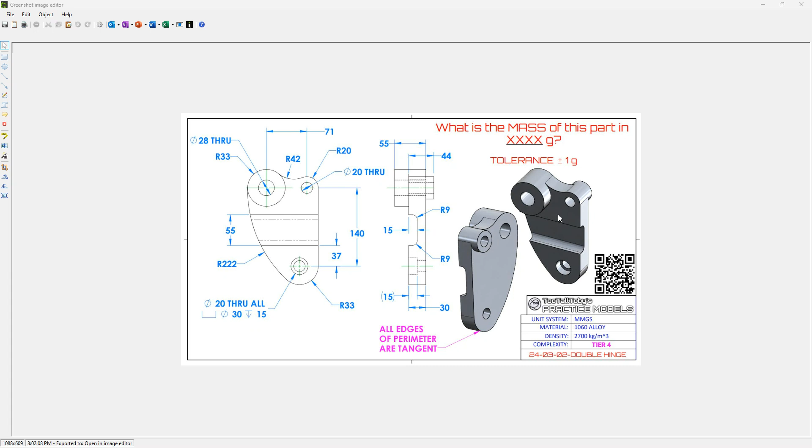This is a double hinge, and this one we'll build in IronCAD using a sketch profile since we have a lot of tangencies here with this shape. So we'll show you how to use our sketch to create that, and then we'll add some extrusions onto this using our drag and drop features for the bosses here and the holes and our cutouts. So we'll go ahead and show you how this is done in IronCAD, and let me move this out of the way.

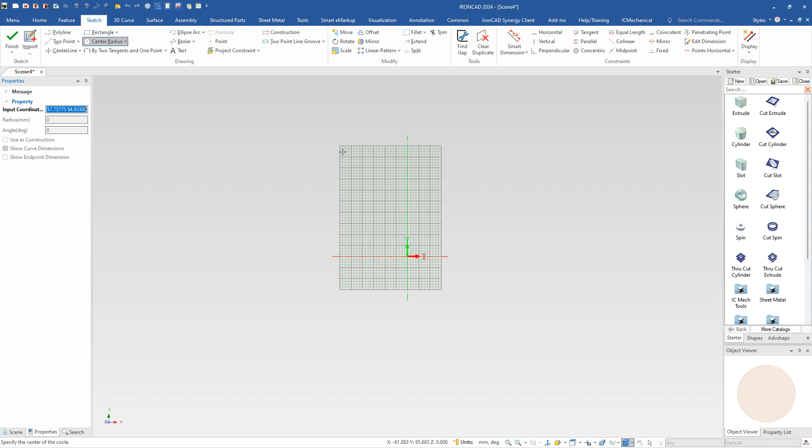All right, first thing we're going to do is start off with a sketch. So we can start off by clicking 2D shape, or we can drag and drop a sketch from our catalog, either one. Now that we have this, this shape consists of a couple things, basically some defining features, which are these circles. So I'm just going to use the circle radius tool, and I'm going to build this up here. And I'm going to right click and enter in a radius value for these. So it's got a 33 up here. And just as you notice, it automatically created a constraint.

If you go to your constraints, you can turn on various things that you want. I have some tangencies, concentrics, and also have the radius dimension created for me. So this is just for my reference, making sure that I get the right value here. And these are movable, and you can also change them if you like to the radius value or the diameter. Either way, you can change those.

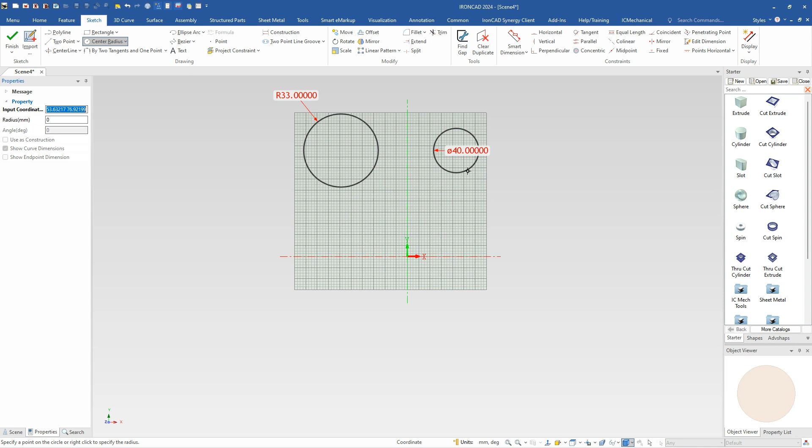So anyways, I'm going to continue to create that, and you can access that same command on the S key inside of here. So we'll go ahead and create another one. In this case, it has a radius of 20, and we have another one down at the bottom that's going to have a radius of 33 as well. So we have two that's got this 33 value, and one that's got a 20 or 40 diameter up at the top.

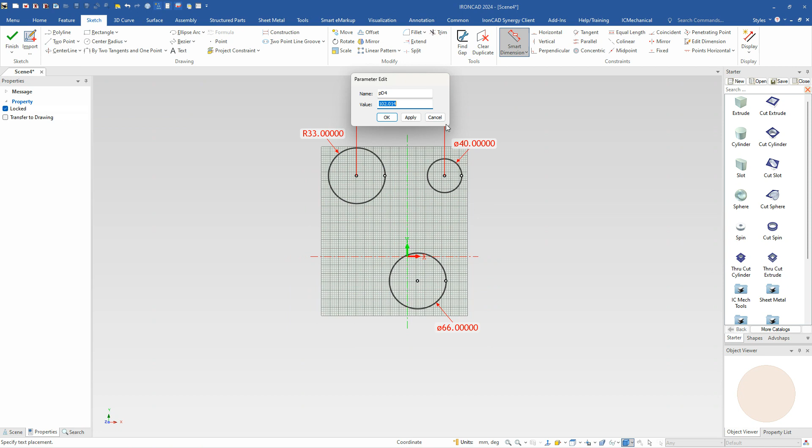So there's some dimensions in here that are useful for this. One, we need to have a dimension between these two holes here. So we'll just select both of these, and I'll pull up this dimension here. It's supposed to be 71. And we also have a dimension from here to here, and you can pull this off in multiple directions. So we want the vertical direction, 140 on that.

And some things that we want to do is we want to make sure that these two are horizontally aligned. So we can just do a point horizontal alignment here just to make sure that these two are aligned and stay aligned inside of there. So that gives us our alignment there, and that kind of gives us our starting point here.

The next thing is we need a line coming down from here. So we'll go ahead and hit our S key, draw a line from here, and that's going to be the 140 value. You can see that it's showing it on the screen, but it's also just hitting to that center point there. So that's our dimension there. And we can lock this if we want to make this vertical. So we can lock that if we like. And we have it automatically tangent created up at the top.

So next thing we need to do is make sure that these are connected here. So you can do either a coincident or a tangency. In our case, we'll just do a tangent to here to lock that down. So that basically gives us our starting point.

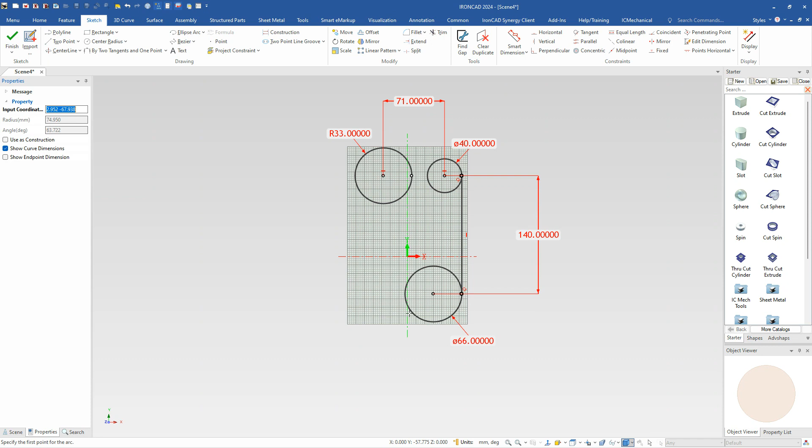The next two things are these arcs here, and what I found is the easiest one to use for this is really just our 3-point arc. You have to do some extending and trimming, but that's okay inside of here. So we're just going to pick these two arcs inside of here, and we'll draw it however the shape's supposed to look like, something like that. And that one's got a value there.

And we'll just go ahead and draw this one as well. We'll pick this other one here. Again, we'll just draw that one as well, so I left click on those, so I just put those two there. I could right click and draw those values, but we can do that after the fact.

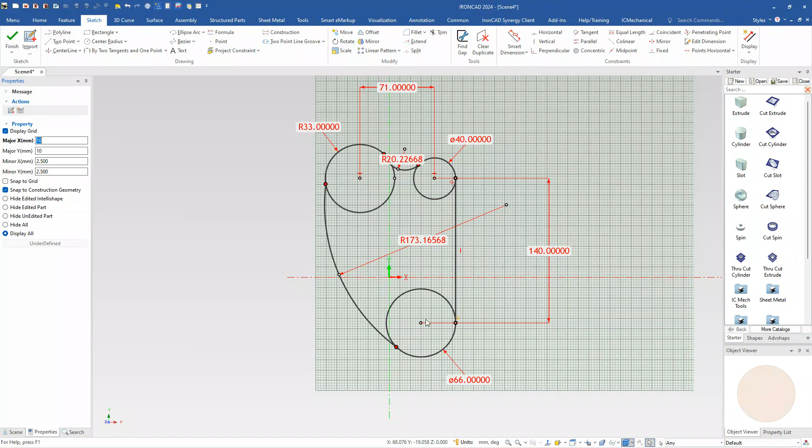So we've got these all kind of set up here on what we want it to be. We can also do a horizontal alignment here to make sure this, but since it's a tangent to this point, this can still move around, but this is horizontal. This is locked at 140, so it shouldn't move around, but we'll just go ahead and edit these values here. So we know this one's supposed to be 222, decided there for that. And this one up here is supposed to be 42 for the radius on that one.

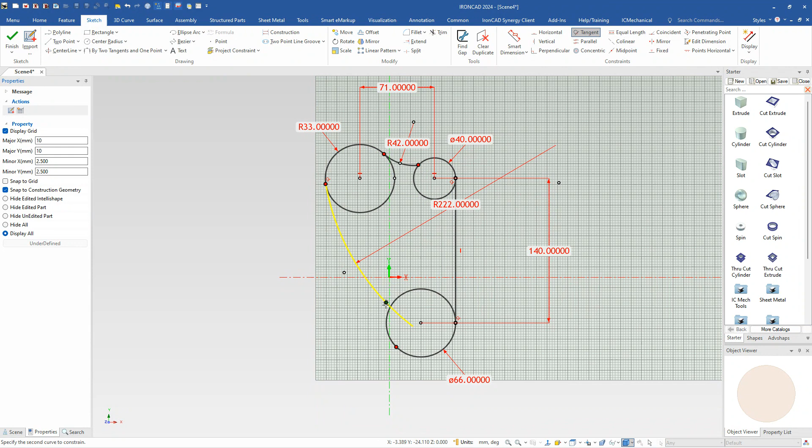So we've got those set up there, and we want to make them tangent as well. So we'll go ahead and add some tangent constraints here. We'll select these two to be tangent, and we'll select this one and this one to be tangent. And we can do the same thing up here.

If you can zoom in, you can do that as well. So pick those two as tangent there, and those as tangent there. And you can see in this example, they don't extend all the way, so we'll go ahead and use our extend tool. We can extend it to that circle there, up there, and most likely down here as well. So we'll have to extend those all to get our shape here.

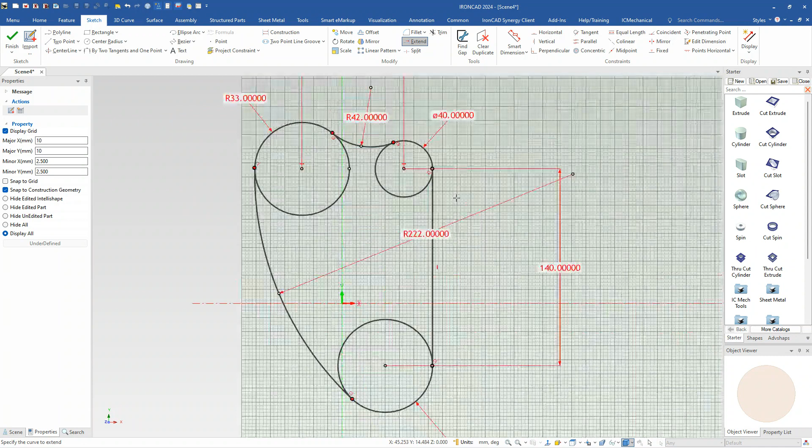You can tell if it's extended by using the trim tool. When you come onto there, you'll see it's only highlighting the dashed green, which is what's going to get cut. So you can see these are all now cutting in the exact shape where we need. We've got all of our dimensions set up here, and everything's locked in the right location. So now we can just trim these off here to get our shape and hit finish on that.

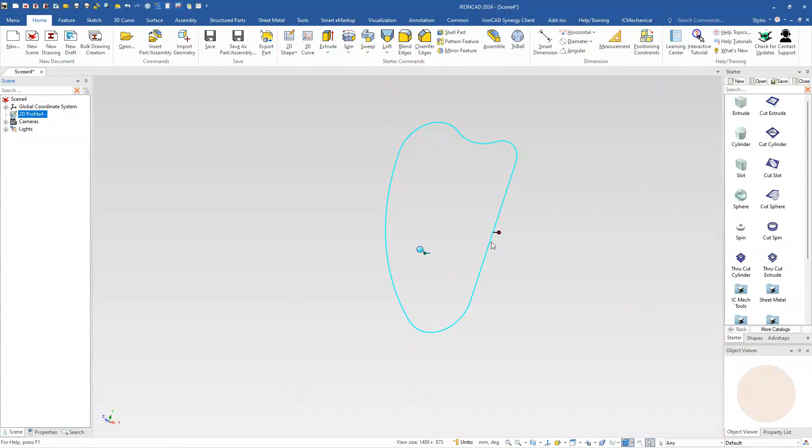From there, we can hit the extrude command, or you can right click and say create extrude. In our case, this has got a distance of 30. So we'll just go ahead and type in 30, hit extrude, to give our shape there. So that's our starting point for our model here.

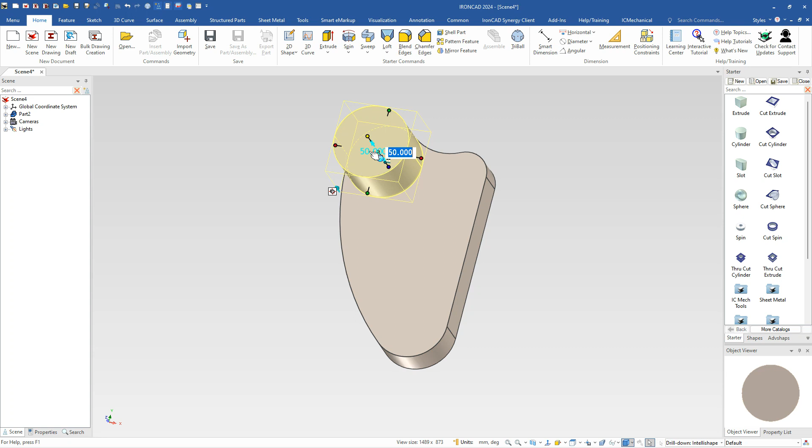Next, we can use our features catalog and drag to the center point here and just snap that up to our tangency. We just need to set the height of that value, which is the total length of 55 from the bottom, so it's 30 plus 25. We'll just set that to 25 since we're sitting on the top face there. So that gives us our shape there.

And then we have to do the same thing for the back side here for this one. So we'll just drag another shape there. It's already sitting at 40, so it's already at the right size. We just need to set the height value, and this one is supposed to be 44, so that's 14 depth on that one. So that gives us that shape there. Fairly easy to do.

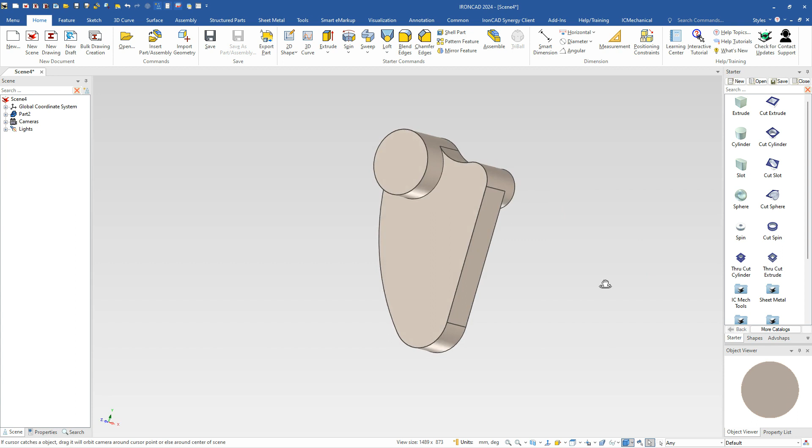Next, we want to add our counterbores here as well, and our holes on these if we like. We know we have a 20 diameter through hole here, so we can just drop a through hole here. Let's go ahead and set that to... I think it was 22, right? Or sorry, 20 on that for that hole.

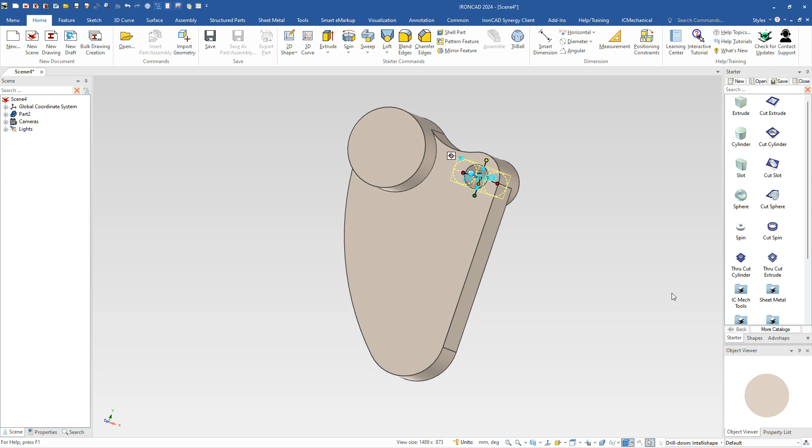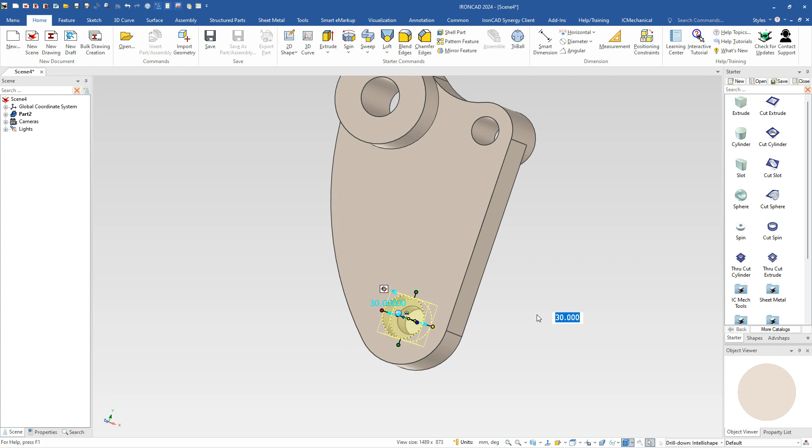And then we have one up here that has a 28, so we drop that through cut up here onto this guy. That one is 28 in that case. And this one down here has a through hole of 20 as well, so we just drop a through hole there, 20 value, and it's got a counterbore on this side as well, so we'll just drop that there. That diameter is 30, and it's got a depth of 15, so let's go down to that bottom handle and set it to 15. So that gives us our holes for that model.

Next, I'm going to just drop an extrude cut onto this face. Depending on your orientation of your model, if I drop here, notice it's extruding down, because this is more of the orientation. If I rotate this over a little bit, it'll actually extrude along that edge in that location. So if you drop on an edge, you have to know what your orientation of your model is.

So it extruded that way, and what we need to do is set the width of that to be 55 inside of here. And I'm going to snap this down to here. Let me pull this down first, pull this down and snap to this value. So it's giving us an offset basically.

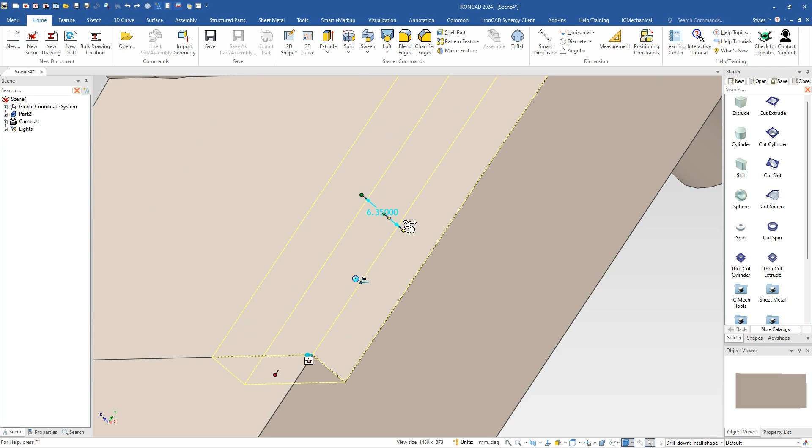So we know the opposite side of that value there needs to be 15 deep. Oops, I went the wrong way on that. So let me grab that handle. There we go, yeah, this handle here, 15 deep under that.

So that's our cutout, and we just need to position it, which in this case tells us there's a distance from here, which we can just say, what is the distance from this edge, or we can just lock this down, right click, distance from center point. You can do it either way, to a point, to the edge. Either way, 37 there for that. So that's putting us in our right location.

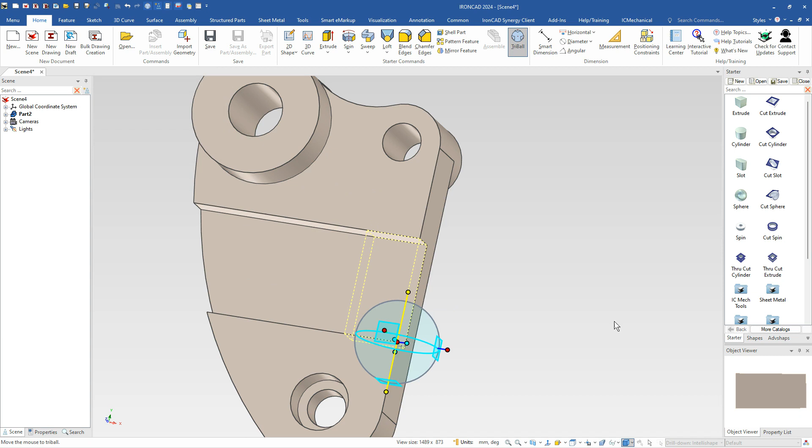And we just need to add our blends here, so we can select our edges here, holding the shift key down, hit blend, and those are a value of 9 inside of there. Replace that, so that basically gives us our shape here. There's no other tangencies that we have to build or anything. That's our entire shape inside of here.

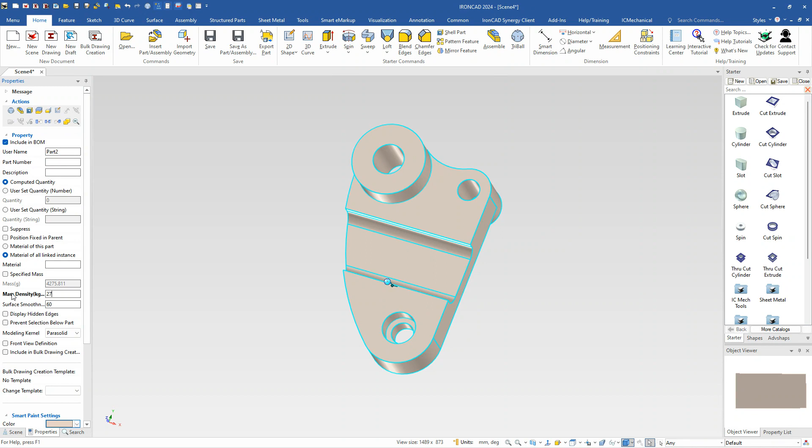So now we can select on our part, go to our property browser. In our case, this has got a value of 2700. Just tab out of that, and that should give us a mass of 1480 in grams. So hopefully that gives you an idea on how to build that model, and hopefully you enjoyed.